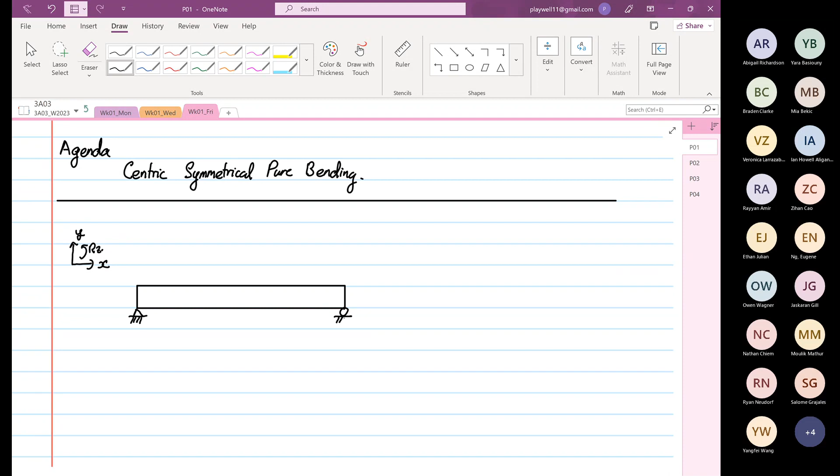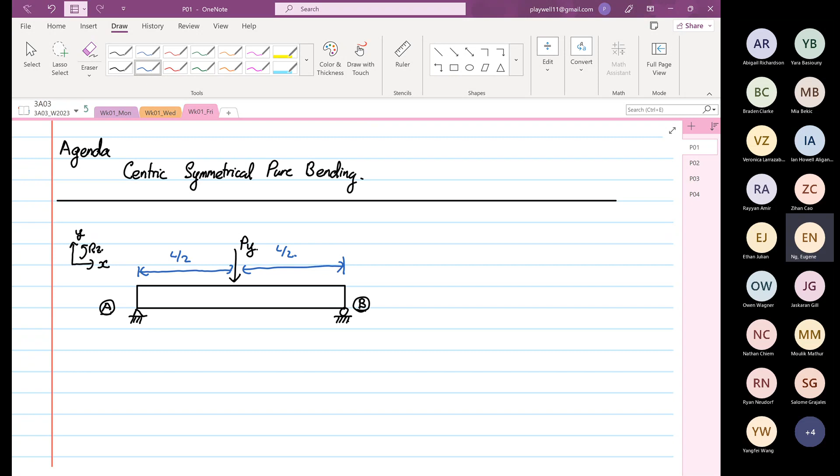So this is our rotation about Z. I'm going to show you 2 types of loading. Point A, point B, PY. Okay. And the distance from here to here is L over 2. Distance from here to here is L over 2. So this is our structure number 1. And then we look at another structure, which I'm going to draw by the side. This is a pin. This is a roller.

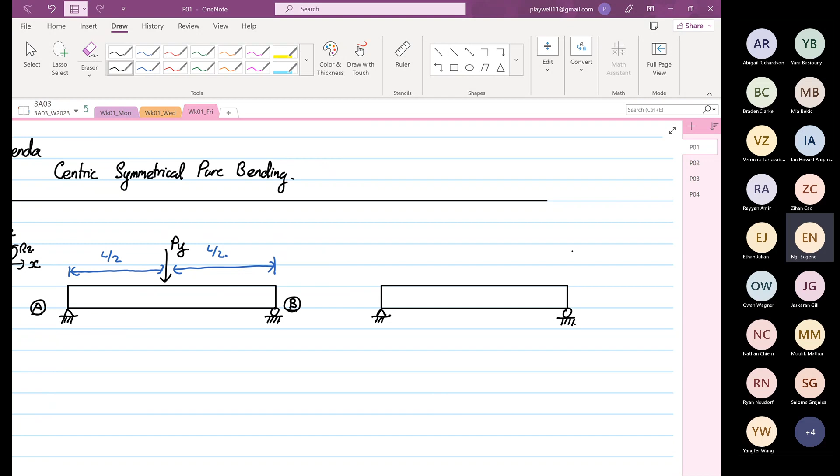By the way, before I go on, you have seen, we call this a pin, right? We call this a roller. So what it means is the boundary condition states that x is equal to 0, y is equal to 0. On the right-hand side, y is equal to 0. X is not necessarily equal to what? 0. Okay? How does it look like in the real world? Yes. And then on the other side? So how does it look like in real life? You are right.

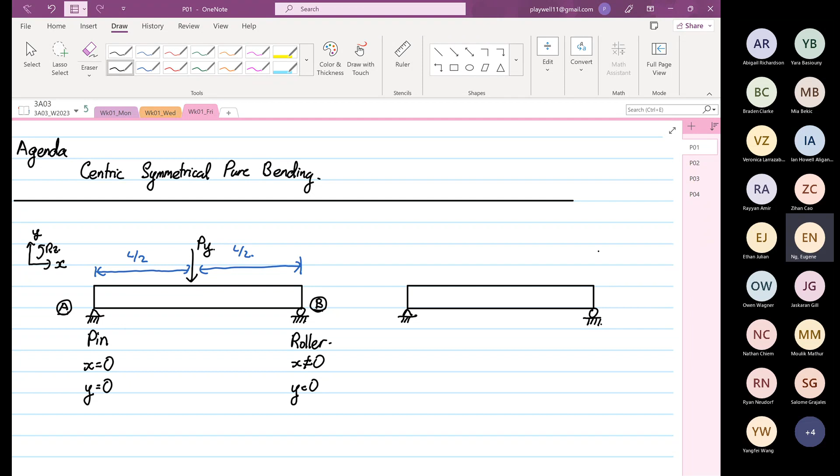I'm not saying that you are wrong. Have you been under a bridge? Those of you who drive or walk over any bridge, go below the bridge and have a look. And what you will see is this. The left-hand side of the bridge, this is concrete, okay? And this is where they place the bridge.

On the other side, is it the same? It's not the same. You only have concrete down here, and the rest is free to move. That's what it means. I know it sounds crazy, but I think all of you should just go under the bridge and see this for yourself.

What we write down here, draw down here, yeah, okay, but actually, how does it look? Because it's important. Until you see what it actually looks like, then you can design. Are we clear? And then with this context, you can see any structures. You can look at it, then you understand the restriction. Am I right? Okay, coming back to here.

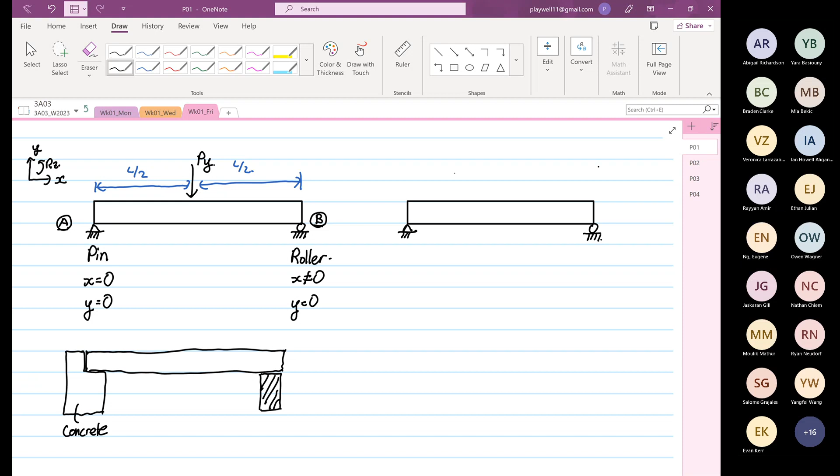The second structure on the right now, we have P, Y, okay? So the distance from here to here is L over 3. And here to here is L over 3. The distance from here to here, L over 3. Okay. Structure condition on the left, condition on the right. Which one is symmetrical bending?

Anyone? Yes. On the left. Hey, don't feel shy. It's okay. Because when I was your age, I would also say on the left. We make mistakes here, and that's it. When you go out and you do the same, I'll come after you. Okay? So one says on the left. Any others? Yes. Both of them are symmetrical bending, or none of them are symmetrical bending. None. You're killing me, man. Okay.

You can't tell from here whether it is symmetrical or unsymmetrical. Sorry, you can tell. Sorry. Rewind. Both of them are symmetrical bending. Symmetrical bending has nothing to do with the location where the force or the distributed load is acting, or whether, on the left, the load is in the center and the left and the right have equal distance. It has nothing to do with it.

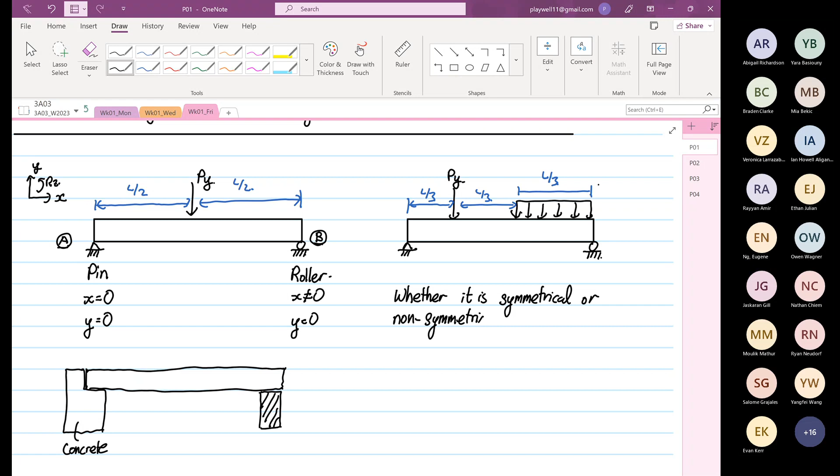Whether it's symmetrical or unsymmetrical is dependent on stress distribution. Okay, so whether it is symmetrical or non-symmetrical is dependent on the stress field distribution. So some of you might say, what do you mean by that?

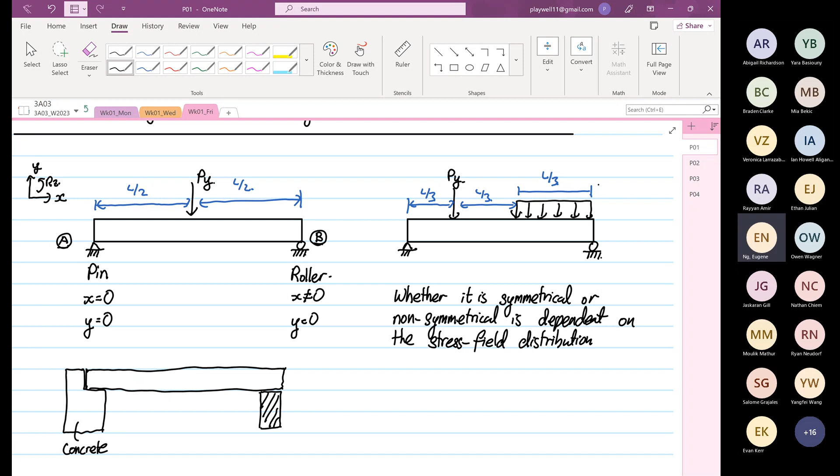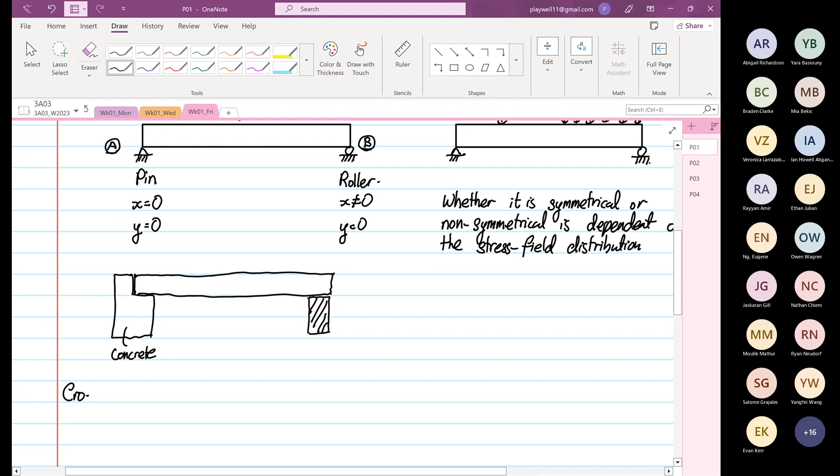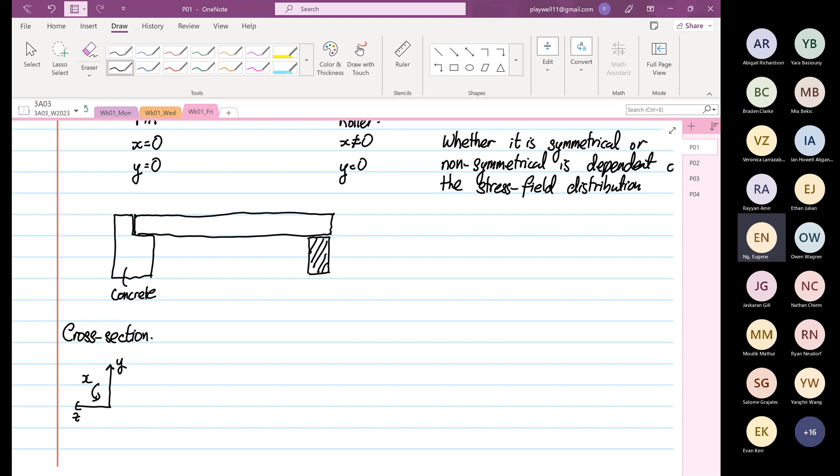Okay, so next I'm going to draw 3 or 4 different cross sections. We are going to draw the cross section. So by following the transformation, this will be my y, this will be my z, this will be my x. So where are we viewing from relative to the structure over here? On the left, we are viewing here. These are my eyelashes. This is my eye. I'm looking from the left.

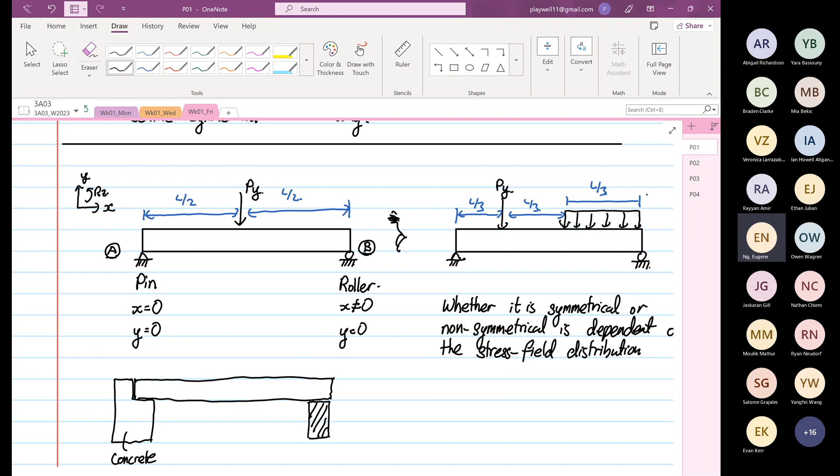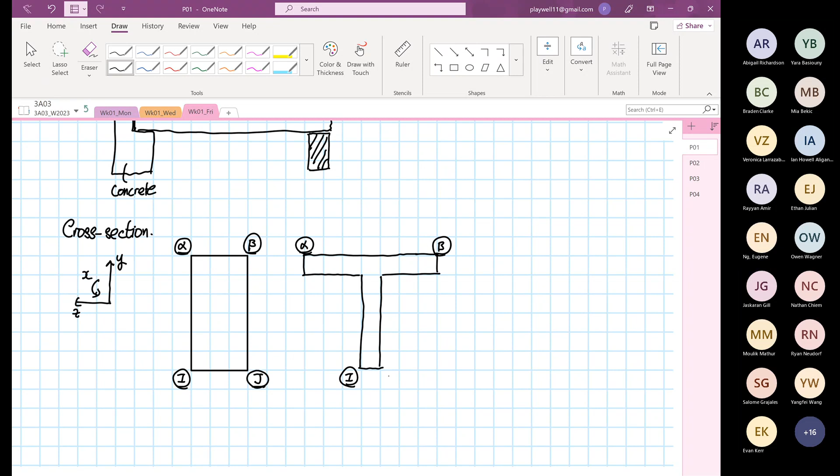So I'm going to draw 3 different cross sections. The first one looks like this. I'm going to call it alpha, beta, I, and j. And then the next one, we are going to have a T-beam. Alpha, beta, I, and j. And the third one, alpha, beta, I, and j. Do I need another one? No, I think this is enough to drive the point. Okay.

So I'm now going to draw the centroid. Can anyone tell me the difference between centroid and neutral axis? Don't you dare come up and tell me it's spelling. Anyone? Yes. So this is the centroid. Over here, this is the centroid. To find the centroid is geometry based. I repeat again, to find the centroid is geometry based. How about the neutral axis? What happens at the neutral axis? Yes. The forces or the stresses.

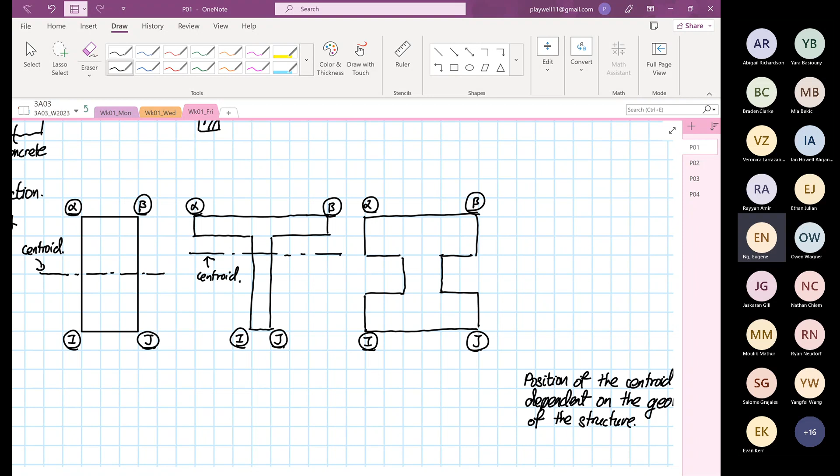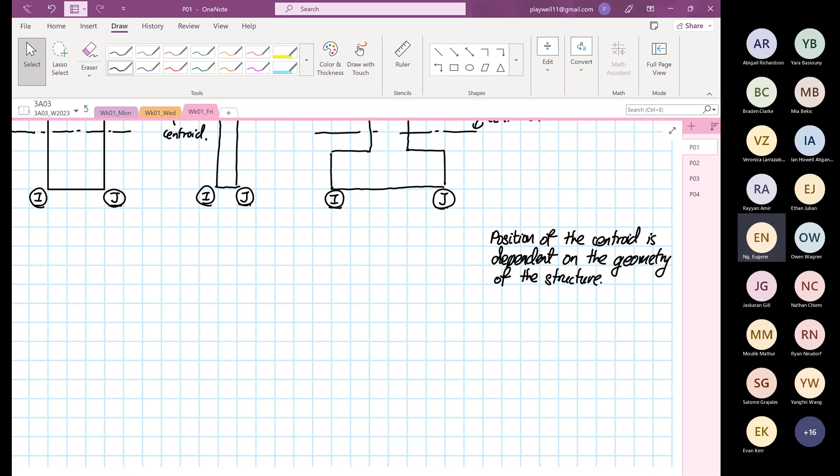Yes? And then for number 2, this is just a guess: 1, 2, 3, 4, 5, 6, 7, 1, 2, 3, 4, 5. I don't know where it is, but I'm just making a guess. This is my centroid. For this case, we are very sure that this will be our centroid. Now, question for you all. Then what is a neutral axis? Yes. So you're partly right. Usually, when we consider, this is in structural analysis, okay?